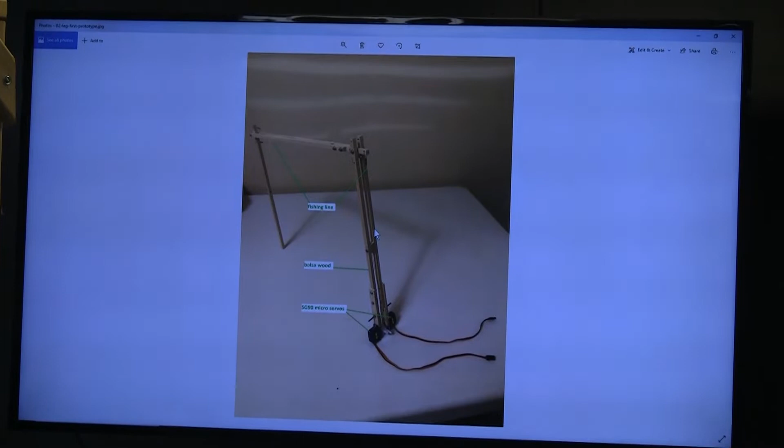So I started experimenting with some designs. I started with micro servos and balsa wood, because it was going to have to be light. But then you can see the design here where I had two servos, one for the inner knuckle and one for the outer knuckle, and I was using fishing line to operate the knuckles.

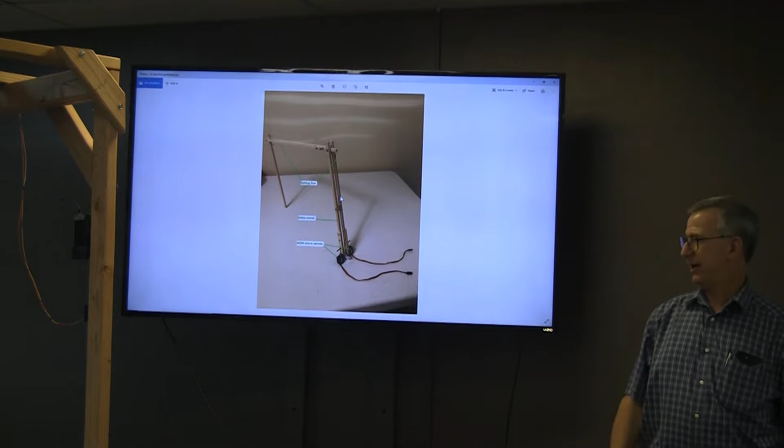And that didn't really work out too well. I was having mechanical problems with it. So I went and enhanced it a little bit and added another joint here.

I started using my 3D printer to print the joints, to make it a little bit more durable and easier to work with. I also went from fishing line to a bowstring here. It's got one servo here to operate the inner knuckle, and one on the other side for the outer knuckle. The bowstring operates the outer knuckle, and the inner joint is just a parallelogram type assembly.

And then to operate the hip, I have a piece of music wire attached to a servo here that moves the hip up. Problem is, those servos are fragile, and I broke about 3 of them before I finally decided there's too much force on the servos and too much weight. It's just not going to work.

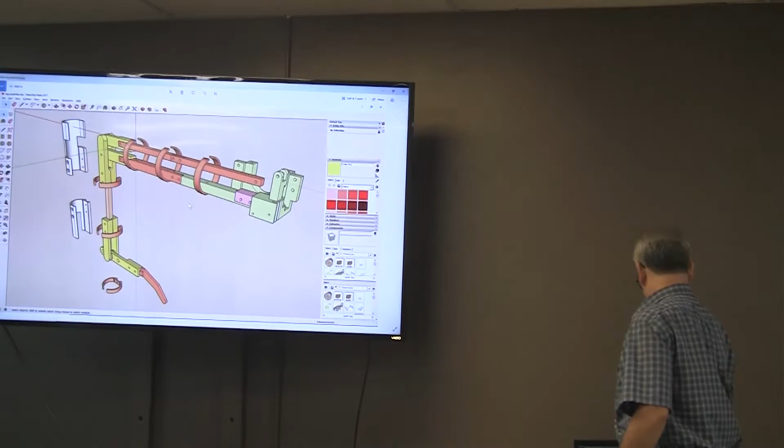So I moved on to the next phase, which was to go to stepper motors, but also to go with a fully blown 3D printed design. Because one of the things I found about balsa wood is every time you put a screw to it, it softens and indents, and then the stuff doesn't fit anymore. Balsa wood is light, and in some cases it's strong, but it just is not very durable.

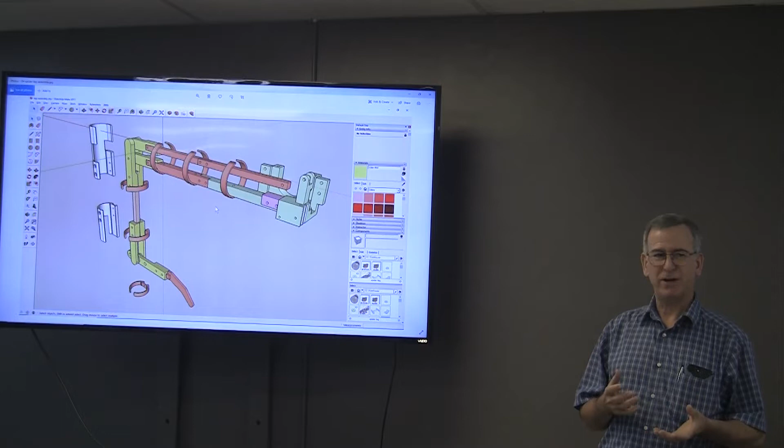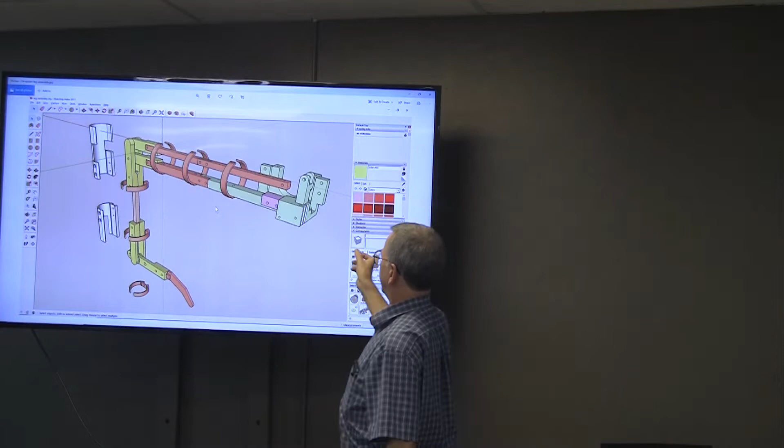So here's my 3D printed leg in Google SketchUp, which is free. The inner knuckle motor goes here. The hip motor, once again, will be out here, controlled up and down with an actuator. And I couldn't get a motor on the leg anywhere, they're just too big.

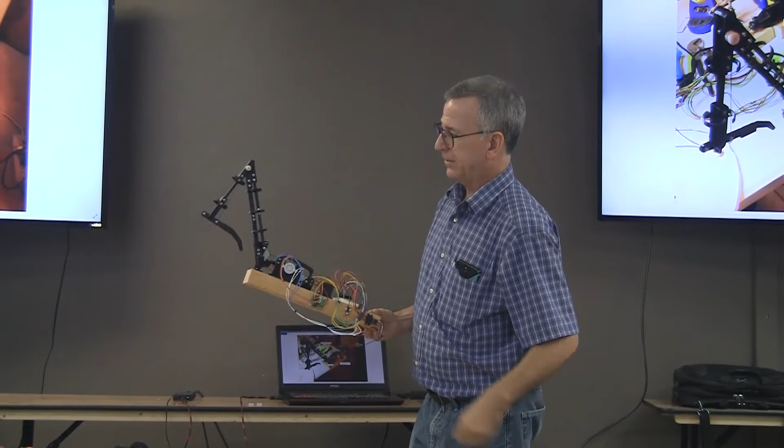So I still went with a bowstring that connects two points here, two opposing points on the outer knuckle, to operate that. It's not against gravity, it's just opposing points on the joint, it'll push or pull. When this armature rotates back and forth, these two points rotate back and forth to operate that. Just like push-pull, like the human body.

And then for the hip joint, to control it up and down, I've got this little actuator bar attached to this third stepper motor. Plus you can see I've got all the stepper motor hardware in here as well, which basically shows you what we were seeing there in a diagram.

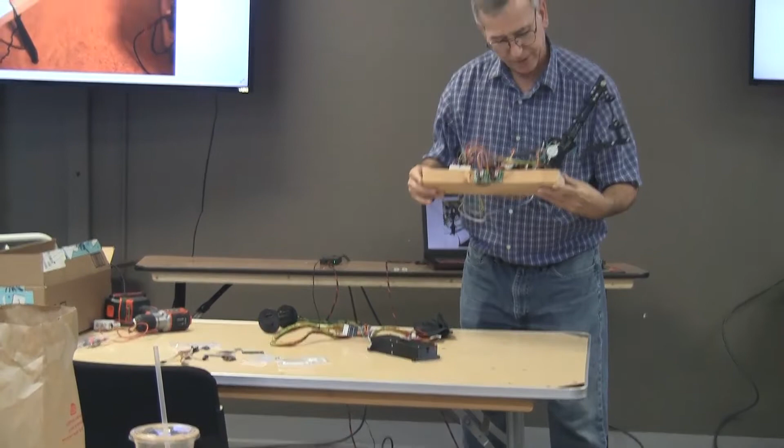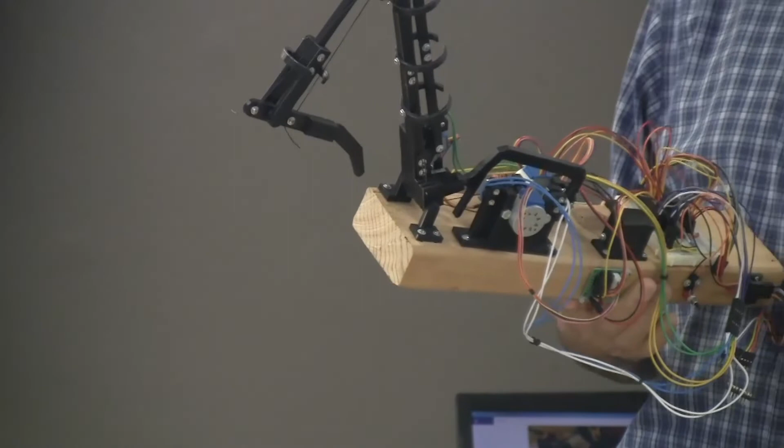There are limit switches. Let's see if I have those attached here. At each extreme of the rotation of the stepper motor, there's a limit switch. You basically hit one, you're at the end, you stop the motor so you don't break anything, then you hit the other. So I've got a clockwise and a counterclockwise limit switch there.

And you just find these small steppers were a little more powerful or durable than the servos? Oh yeah, you get more torque, and they're easier to attach things to. There's a 5-volt version and a 12-volt version, you want to use the 12-volt version to get the extra torque. And that's a geared stepper, not a direct one? It's geared, I think. Yeah, I thought they were.

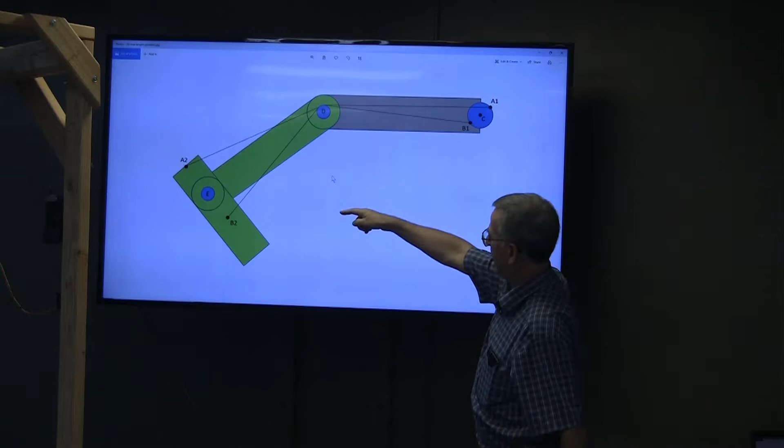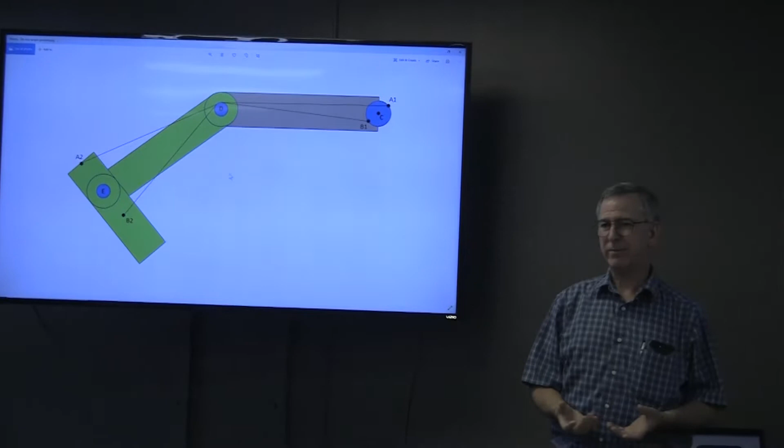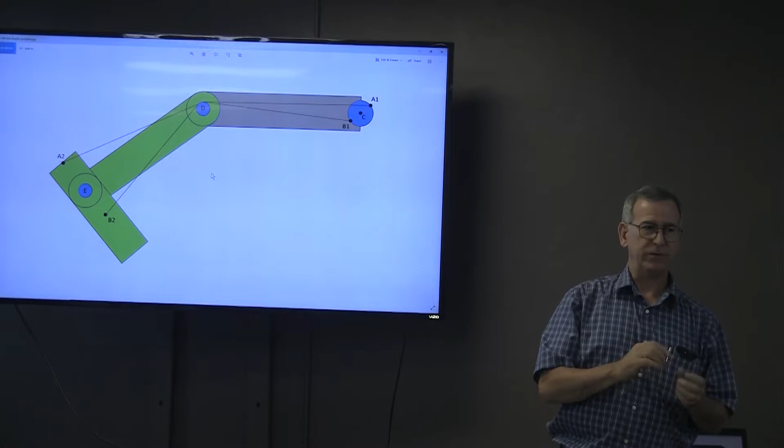This is one of the problems I had to overcome with the bowstring: when you have a bowstring line that runs over this middle joint to operate the outer joint, the line A1 to D to A2 - if you rotate the outer portion down, you can see the bowstring now travels a greater distance around this intermediate point. So every time I'd bend the joint, the string would be tight, and every time I extended the joint, it would be loose, and sometimes it would come loose and not stay attached. I gave up trying to find a mechanical geometrical solution to that. My solution was just to make the diameter D as small as possible - I've got a 16th inch diameter brass rod that the line goes around to minimize that effect. But that was one of the problems I had to deal with.

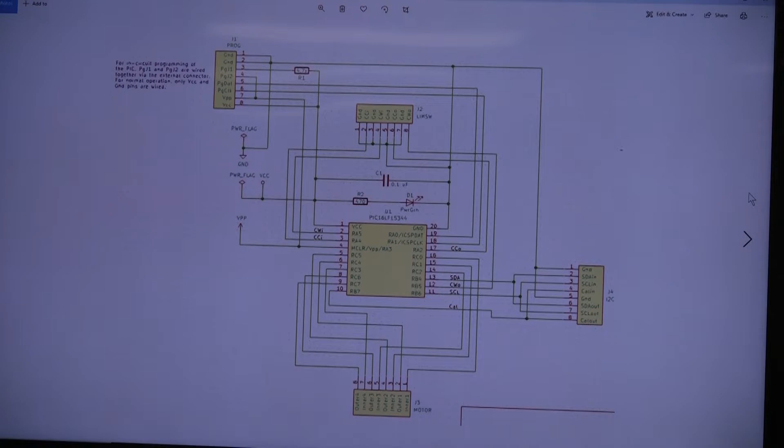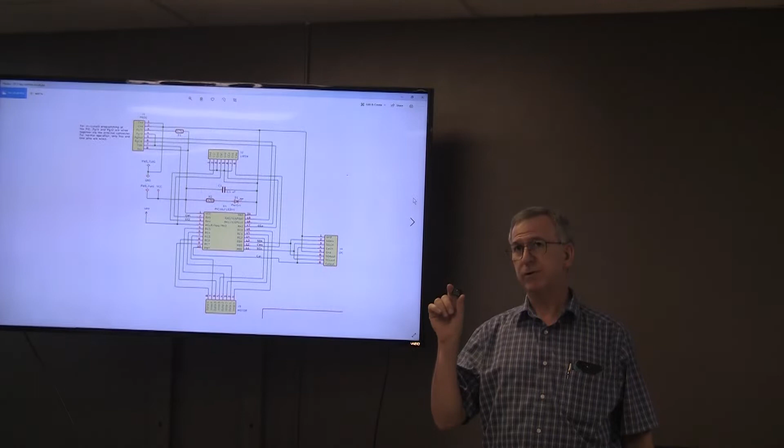This is the spider leg control circuit. I have an earlier version of the design right here. I designed this in KiCad, which is free software for circuit design, and had the boards manufactured by a company called OSH Park. The nice thing is manufacturing these boards is really cheap because they do it in big batches - you get boards this size, 3 of them manufactured for well less than $10. So that's a great resource. The core of every board I've got here is a PIC microcontroller.

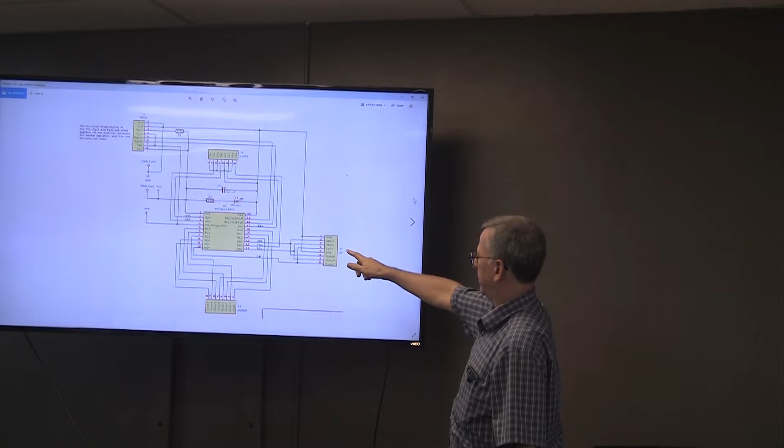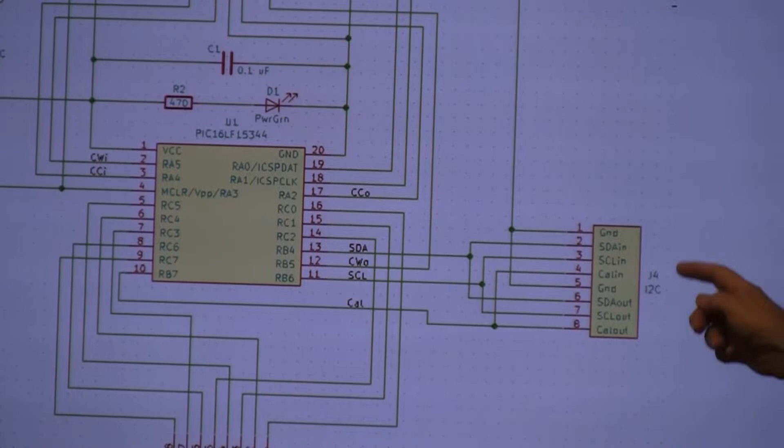This particular one has a power and programming connector feeding in. I've got clockwise and counterclockwise limit switch inputs coming in on some of the IOs. Then I've got a connector over here for communicating with the main controller - the main spider controller - via an I2C interface, so the serial data and serial clock are there. There's also a calibrate line here, I'll explain that later. Finally, the outputs here go to the motor - these are the individual phases of your stepper motor, going to the motor driver.

Then I press the calibration button and it moves to the next state, the stepper range calibration state. Now both knuckles of each leg will go through their full range of motion until they hit a limit switch, and back off, hitting the other limit switch. Now I've got a range of steps that corresponds to a range of resistance or voltages from the flex sensors for each leg. That helps me keep everything calibrated so I don't overrun the end or get any weird stuff going on.

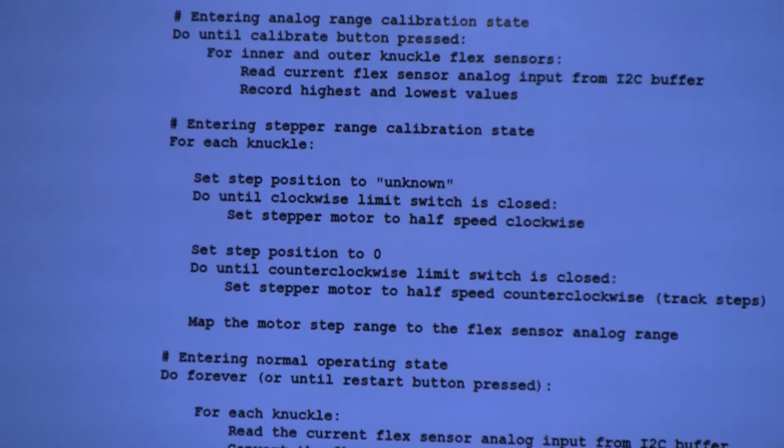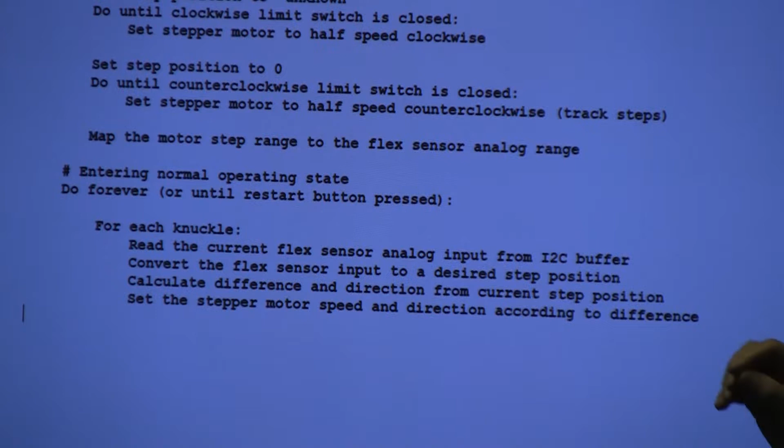After it finishes cycling the motors to the extremes on each knuckle, it automatically goes to the normal operating state. From now on, it just reads the I2C buffer measurements from the flex sensors, converts those flex sensor inputs to the desired step position based on the ranges I found, and based on the difference, calculates the direction it wants to go from the current step position, setting the stepper motor speed and direction accordingly. There's a bit more in there - for example, I put in an algorithm for proportional integral control, which smooths the motions of the leg out a little. So as the knuckle approaches its final position, it slows down and won't overshoot, so it's not very twitchy.

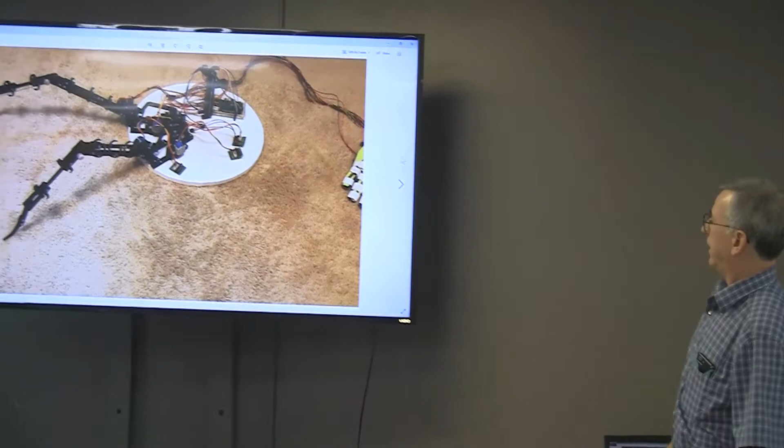Now I had to start deciding how I was going to fit all of this into the frame of a spider. So I started building multiple legs, putting them next to each other and figuring out whether I could fit all the hardware and wiring in there without getting anything snagged. So that's what you see here.

In the early stages, you can see I was driving the legs directly from the glove. This is a prototype of my data glove. You'll see later where I changed that design for remote control.

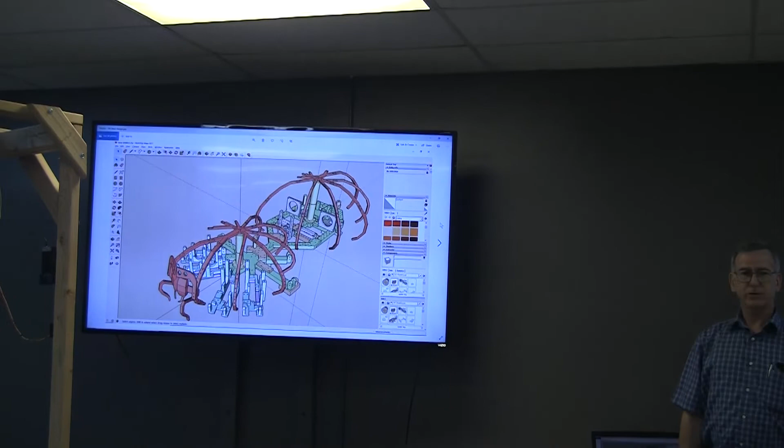So moving on, I went to Google SketchUp and finished out the rest of the frame, the base, and the skeleton.

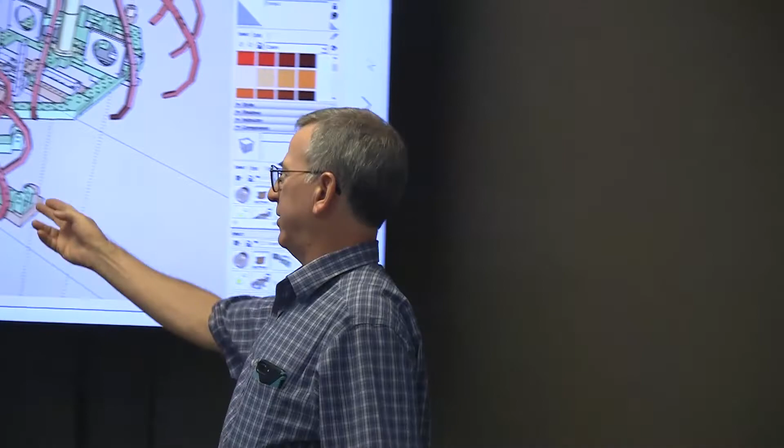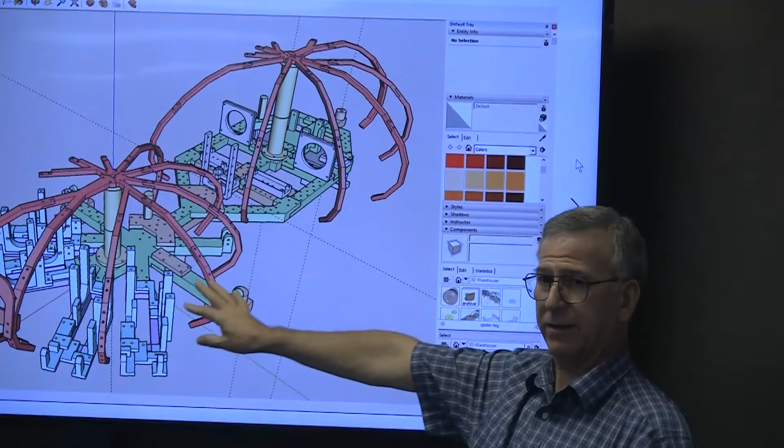Basically you have the 4 operable legs right here. The challenge here, and I wish I'd done this differently, maybe next year I'll modify it, is that one of the problems with these stepper motors is they come with fairly short wires to the driver board. I was unwilling to cut those permanently and extend the cable, so I had to mount the control boards as close to the motors as possible. This really created a mess because there's a lot of stuff packed into the end legs. If I modify this design in the future, I want to put longer wires in there and pull those boards back into the middle of the spider, leaving more room, because it's really a pain to take them apart, make adjustments, and put it back together.

You can see positions for speakers here, because I wanted to put sound in. There's a center stack for mounting my leg controller boards, 6 of them in there.

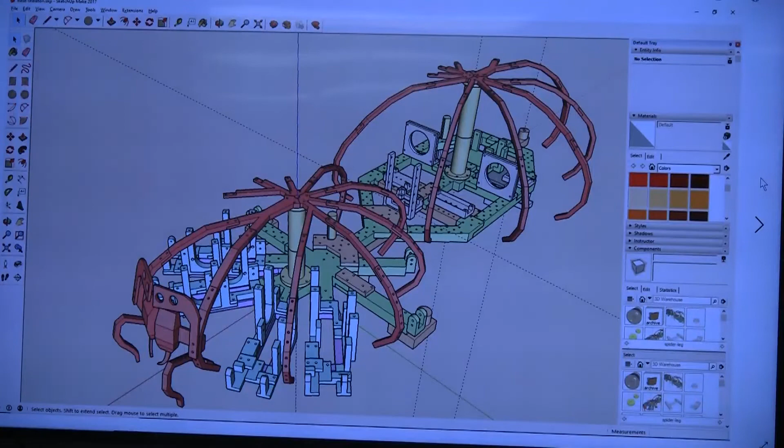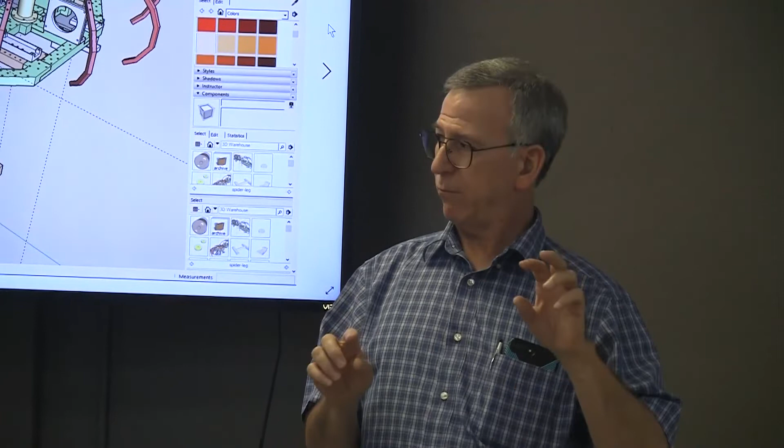For each leg, the inner and outer joints are operated by one leg controller board each. For the hips, I've got a bend sensor in the wrist of the glove that controls hip position, but all the hips raise and lower together. We've got one board to drive the hip joints on the right, and one board to drive the hip joints on the left. So that's why I need 6 boards.

So was that for a twerking spider? What's that, the hip joint movement? I'm just going for as much realism as I can get to.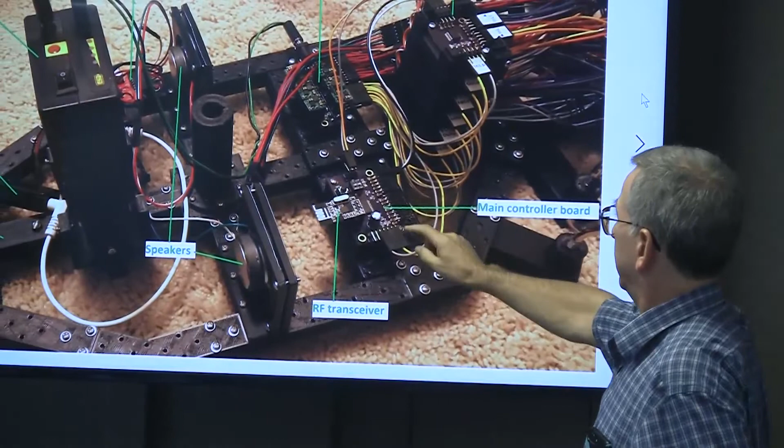So here's a closer look at the innards. There's the leg and hip controller stack, where I've got power here, and the motor connections out on this side. This is all on an I2C interface, so they're daisy chained together on the opposite side - you can see the wires there. All the leg controller boards are daisy chained, and I've got the master controller board here, which talks through the I2C interface to this stack. So there's a master for the 6 legs.

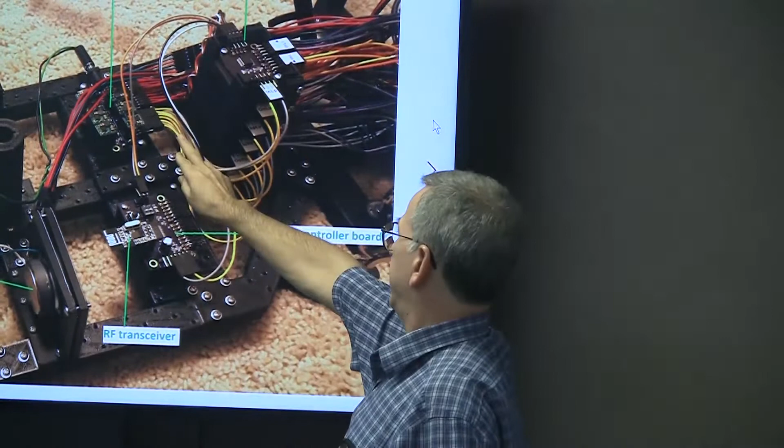Also in KiCad, I had a manufacturer make an Oshpark power distribution board. These are 12-volt step-down converters, 12 volts to 3 volts. So we've got the red line, which is 12 volts going out to the stepper motors, and 3 volts coming out of the power distribution to all the electronics.

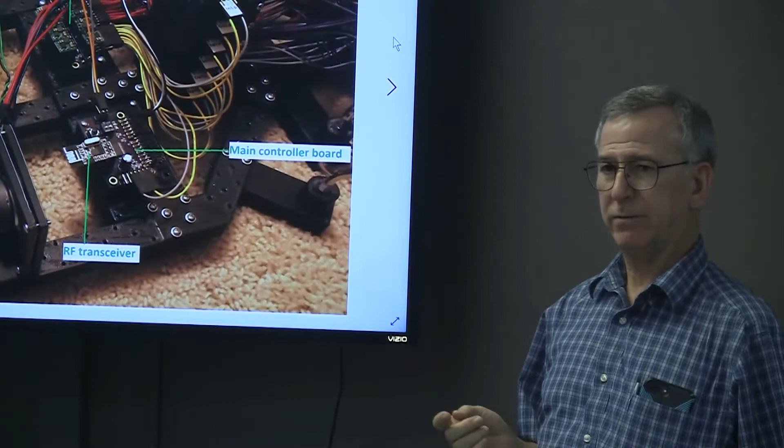The main controller is also responsible for remote control. So there's an RF transceiver plugged into the main controller board to talk with the unit on the glove side.

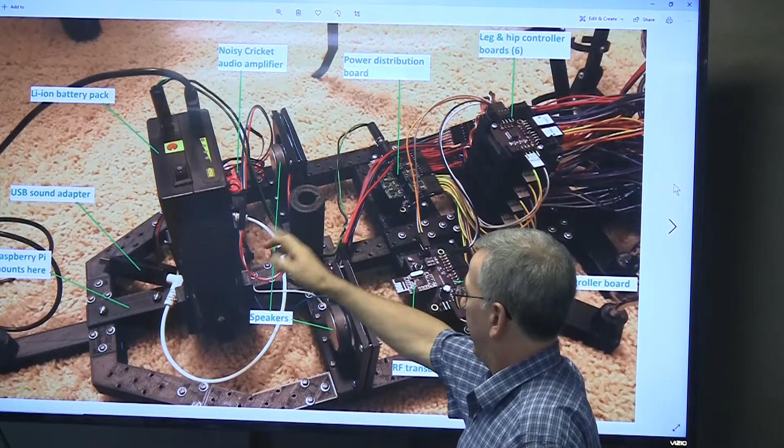Of course there's my speakers. I got a Noisy Cricket audio amplifier from SparkFun, a nice small amplifier to use with the Raspberry Pi. I also needed a USB sound adapter that routes into it. This battery pack is an older design - I went from vertical to putting it underneath because I realized I needed to get to the power switch, so I found it easier putting it underneath instead. And then the Raspberry Pi that I use for playing sounds and lighting the eyes goes here.

Your RF transceiver, is that Wi-Fi or? No, it's basically like RC control type, the same kind of chip they use in RC planes and drones. They're pretty cheap too.

One of the design constraints here was I didn't want to blow a lot of money doing this, so the boards are not very expensive to manufacture. All the software I'm using is free. The stepper motors are really cheap, less than $5 each. So you can get away with a lot if you're willing to make some sacrifices in your design.

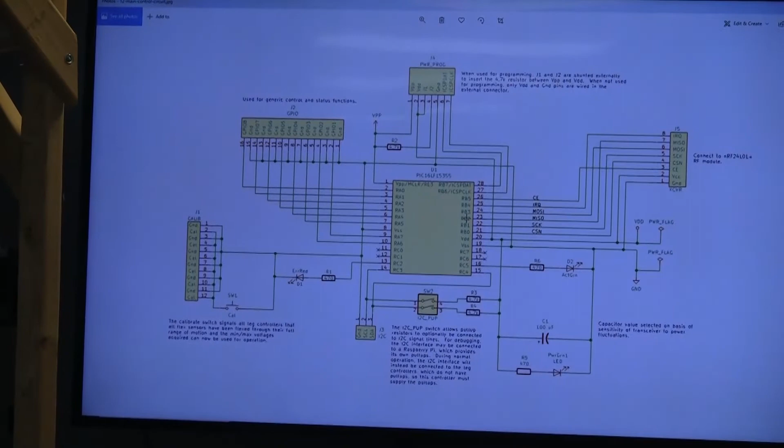Okay, this is the main controller that I talked about earlier. Once again, it's got a Microchip PIC microcontroller in the center of it. The RF module doesn't use I2C, it uses the SPI interface, so there's a SPI interface connector right here to the RF module.

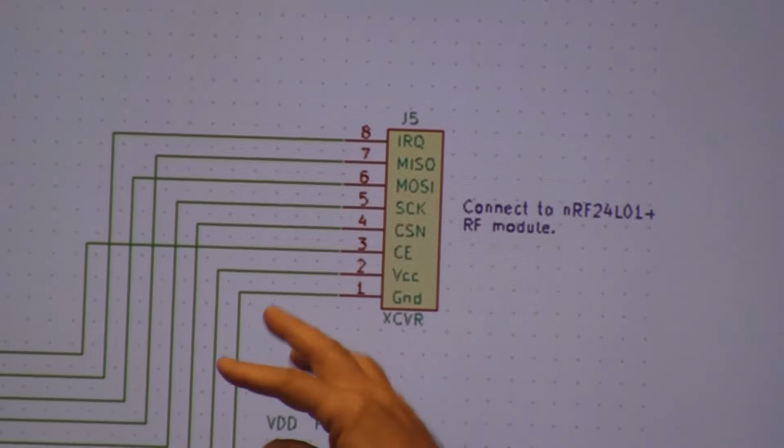I've got a little semi-standard power and programming connector that I use. It's got a jumper on it so I can tell when I'm programming or tell when I'm just supplying power.

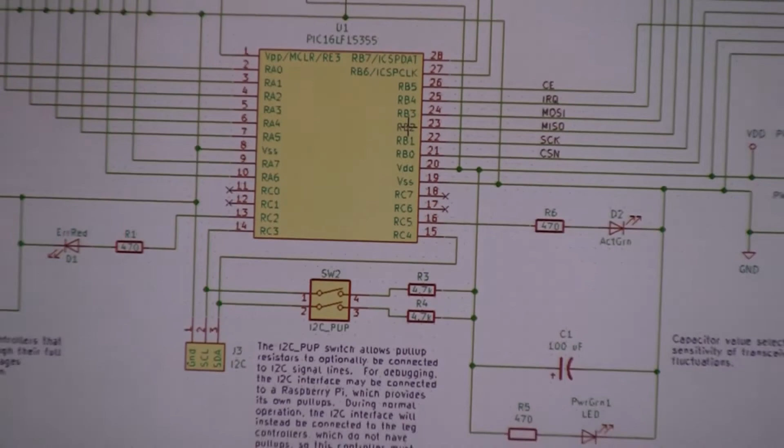I don't really use all of these anymore because I changed the design, and I only use one calibration line that goes to the whole stack of leg controllers, and that sends the signal, daisy chains the signal to all the controllers in the stack.

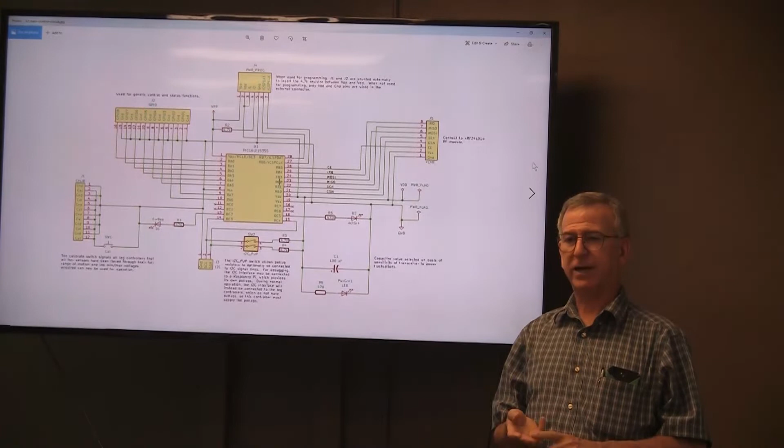I didn't mark the individual uses for these GPIOs that I pulled out, but these GPIOs are for, well, there's the calibrate signal, there's the signals that go to the Raspberry Pi and the Raspberry Pi's GPIOs for selecting the sounds to play, and there's the motor signals to operate the gantry motor to lift the spider up, and those have to come out of these IOs right here. Now we'll get into that.

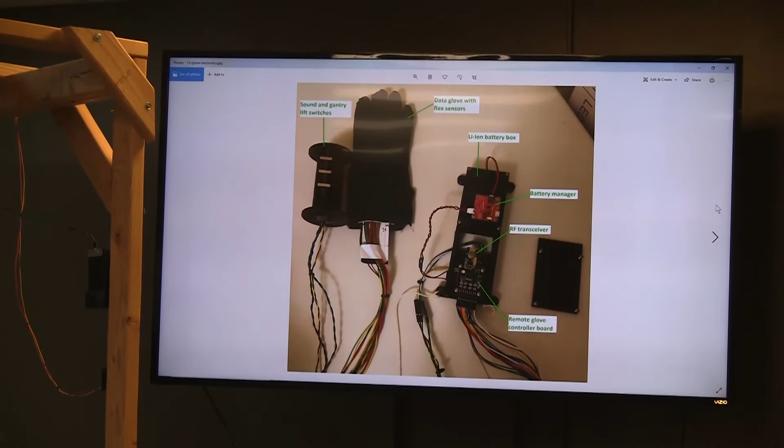All right, so here's the glove hardware. We've got an RF transceiver, just like the one on the main controller, that plugs into the board. The remote control board for the glove is here.

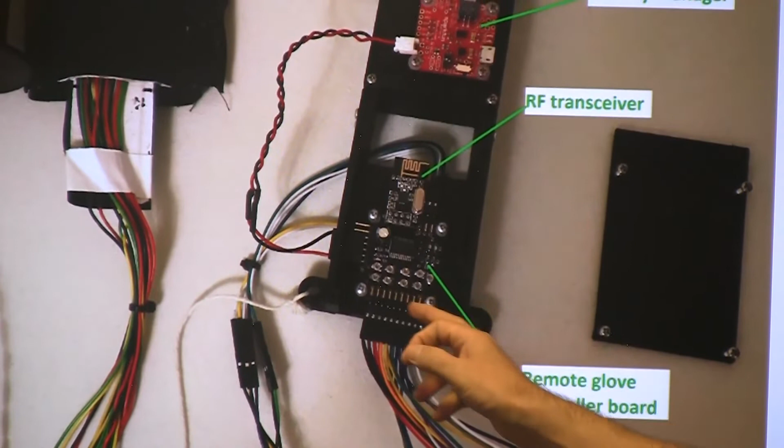And you can see on this side, I put a little extra hardware in there I needed to be able to adjust the resistance of the flex sensors a little bit, because that's kind of a little bit variable, so I needed to be able to tune these.

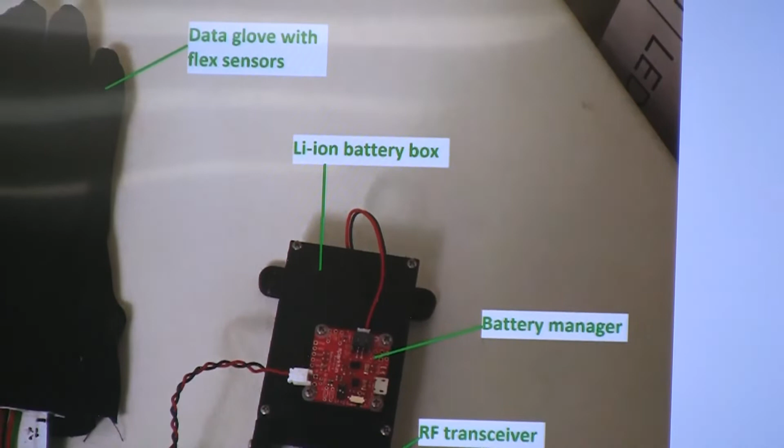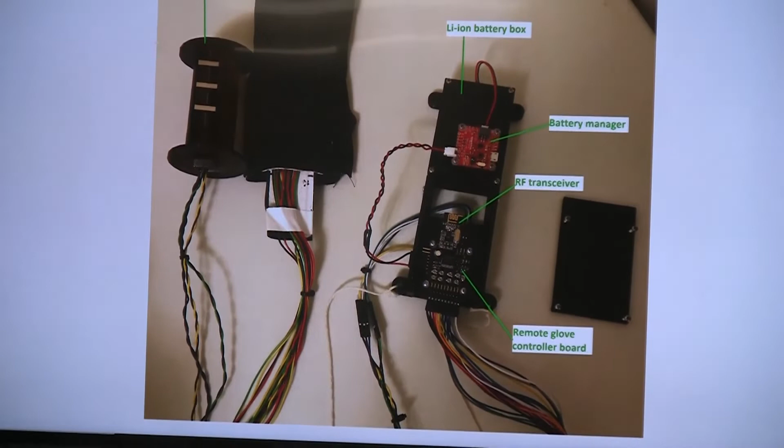Other than that, there's a lithium-ion battery inside that box, and I put a battery manager right here to help with the power. And then there's also a 3D printed design for the other hand that has 3 switches on it. Two switches select sounds to play, and one switch is a toggle that raises and lowers the spider of the gantry.

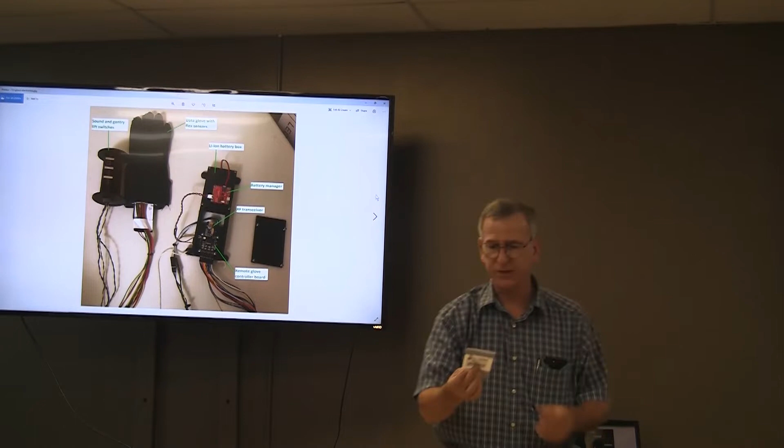And the flex sensors, I don't know if y'all have ever seen them, but I've got a sample here. You get these from Adafruit. Unfortunately, these are one of the more expensive components. This one 4-inch flex sensor is $13.

How many did you need on the glove, total flex sensors? I had 4 long ones and 4 short ones—I'm sorry, 5 long ones and 4 short ones, because I had the wrist sensor as well.

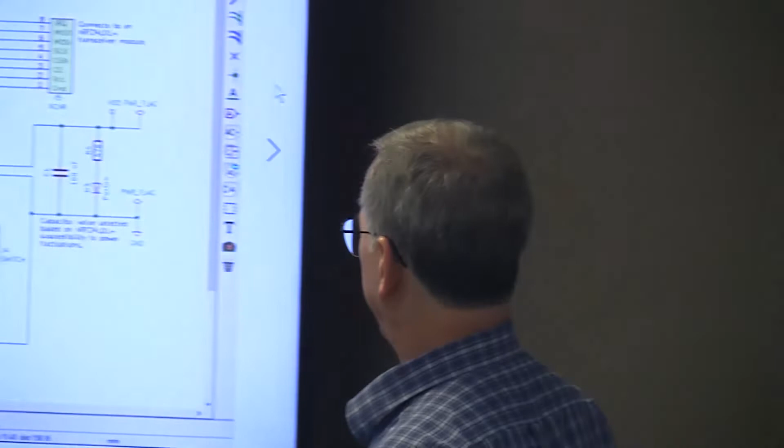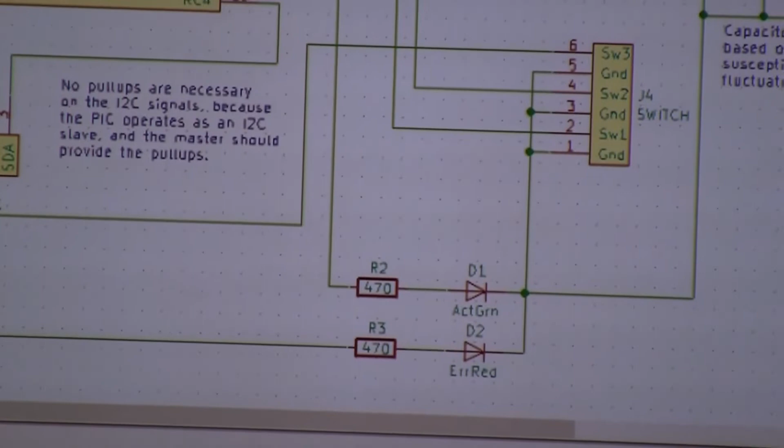And let's see, this is—did I just go backwards? No, I didn't. This is actually the glove board. You can see there's the trim pots that I put on the board. Once again, the PIC and an RF connection, power and programming connection, and then the IOs for the switch come in through this connector, and then all of the flex sensors come through this port right here.

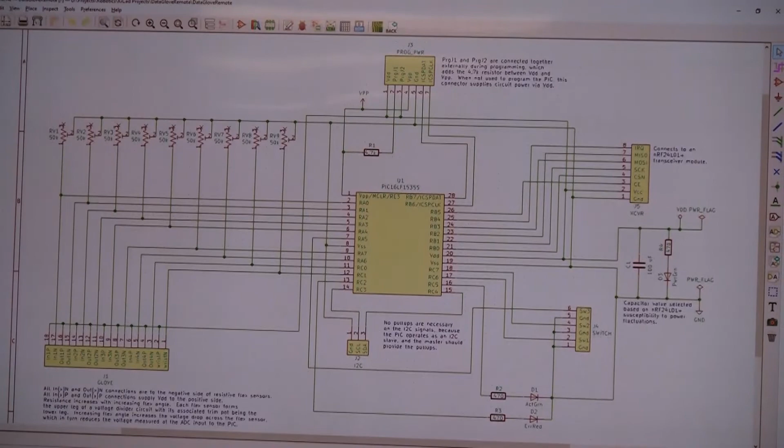So one of the things I had to do here was account for the PIC only being able to measure up to—at least the low power PIC that operates at 3.3 volts—it can only measure voltages up to 2 volts. So that's the other reason I had to have some kind of tunable pot in here. Each circuit here is a voltage divider, and I need to be able to adjust the pot so that the maximum flexure would generate a voltage right at about 2 volts. That's the extreme of what the PIC can measure.

You couldn't source the resistors with a lower voltage—you could have, I guess, but you could have regulated a 2 volt or whatever supply for the flex sensors, and then they would be limited to that voltage. No, that's one thing I hadn't considered. But anyway, either way, yeah, I could have put a 2 volt supply regulator in there. That's a good idea.

And then, not much to see here, because you can see the gantry yourself, except that the motors—and this is before I put a box on the motor, because one of the problems with this motor is it's very noisy. So I kind of put a box around it and put some rubber in there on the mounts, and it's still kind of noisy, but, you know. And then, of course, there's the wire you see coming down here to the motor controller for the lifting and the lowering.

That's taser wire, which you might find very useful. It's very thin, very hard to see, so at night it just looks like part of the webbing. That's one of the reasons I chose taser wire. But it does tangle easily, and you get caught in it like real spider web.

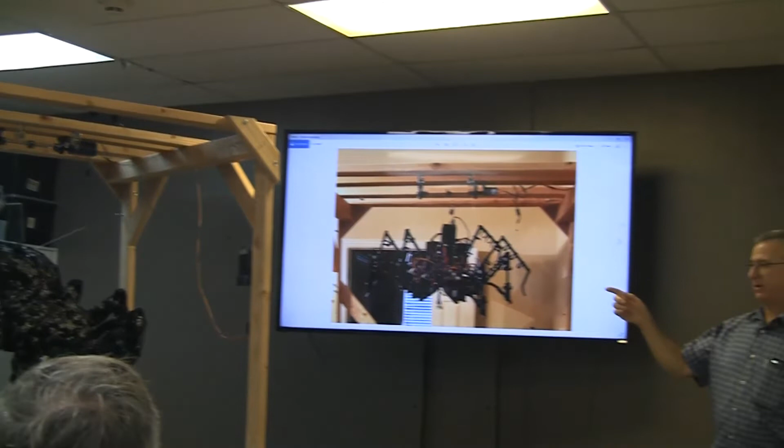But so the taser wire, what's the purpose of the taser wire? Well, the spider has one of these power packs, and the gantry has one of these power packs. But I'm not using remote control to go from the spider to the spider gantry motor, so I needed to run the wires up to control, just signals. I don't want the spider driving the gantry motor - not the power driving the motor on the frame. So it's not cutting into the spider's power, it kind of splits the power distribution.

Okay, so this is where it was finally coming together. Went to Jo-Ann's with Mike's wife and sister and picked out some fabric, and they're the ones who basically did all the hard work on the fabric, because I don't sew.

And I will chime in that was interesting, because my wife decided to mess her shoulder up. She was planning to do all the sewing, so my sister ended up having to do all the sewing, and she was not real happy with all of the problems, because it took her quite a bit of work to get that fabric wrapped around there in a way that looked like it should.

Yeah, we were wondering about the silver in that - did you guys paint that on? No, that's the way the fabric came.

It's hard to work with, very difficult to work with. Is there any name for that fabric type? No, it was something they set out for, I think, for Halloween. Was it Halloween fabric? I'm not sure if they explicitly set it out for Halloween, or we just managed to find it. They spent hours at the fabric store looking, because we wanted something light and fairly thin, with some furry look to it.

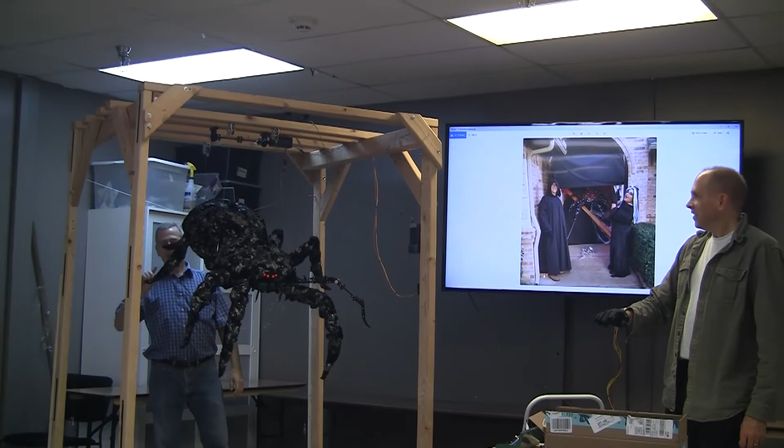For some reason, I think I've got feedback in there where it triggers one of the GPIOs when I reset the calibration. It works, but it doesn't like a reset. So now flex your fingers to the full range of motion.

Flex out, out, flex back, flex out. And bend your wrist up and down.

Now, don't calibrate now according to, let's wait for it now. Wait, okay, not yet. It's still doing its thing. It's not in the state yet where it'll operate.

It wants to teach Carl what to do. Who's controlling who? Then move over so you can see what you're doing.

Since you have limit switches on the stepper motors, why do you need this calibration? Maybe it's a little bit of overkill, but the stepper motors will slip over time if you apply any kind of weight. So there's a lot of things in here that I did that may not seem necessary.

If you keep flexing those sensors, probably the resistance is going to change a little over time. That's the other thing too, you can measure each of these flex sensors to their full range, and they don't all match exactly. Plus there's variations in the glove, and how the flex sensors fit against the fingers. So I basically tried to eliminate having to mess with any of that by making everything adjustable.

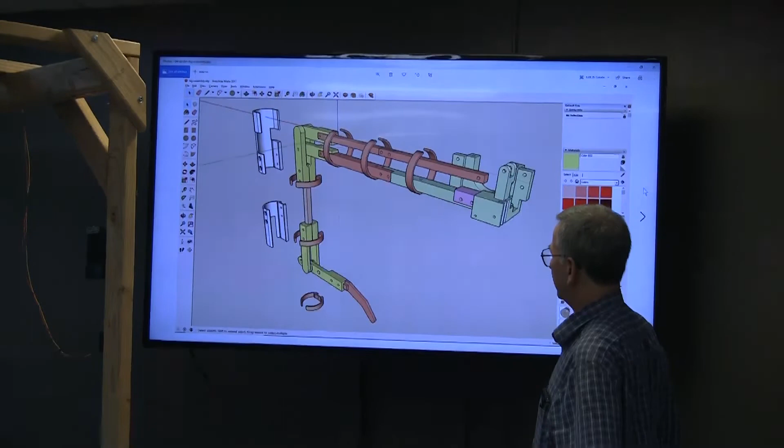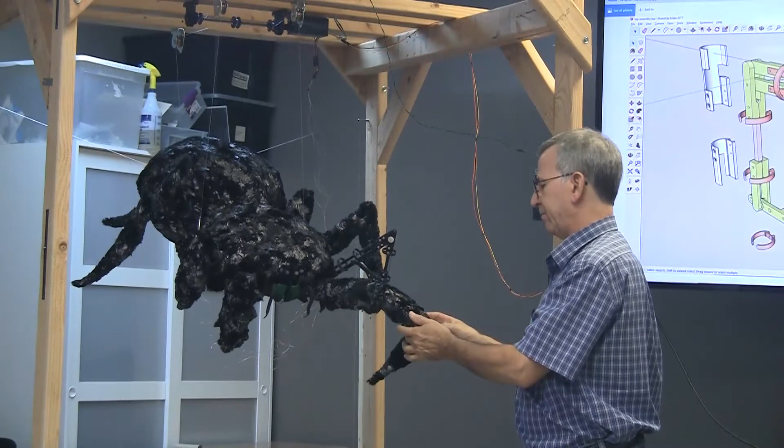Trying to overcome some of the difficult problems like the fabric being snagged. One of the things I had that I didn't explain was in the leg design, these white pieces you see out here on the end. I was experimenting with different ways to mount a sheath on the outside of the leg. Instead of having fabric sitting loosely over these ribs, I was thinking I could attach the fabric to these sheaths and have segments of fabric, not one long piece, with maybe a split that you really couldn't see well. That would keep this material from binding up on the leg and preventing the joint from moving. So that's one of the things to overcome.

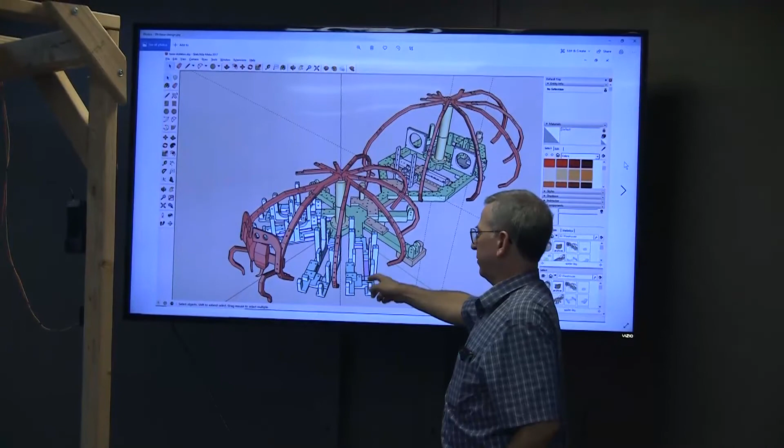The other thing is, as I pointed out, all of the motor driver hardware being packed into this small space makes working with the whole thing very difficult to take apart, adjust, and put back together. So if I come up with some extensions to those stepper motor connections, move the boards back further into the spine... Were they a weird pin spacing?

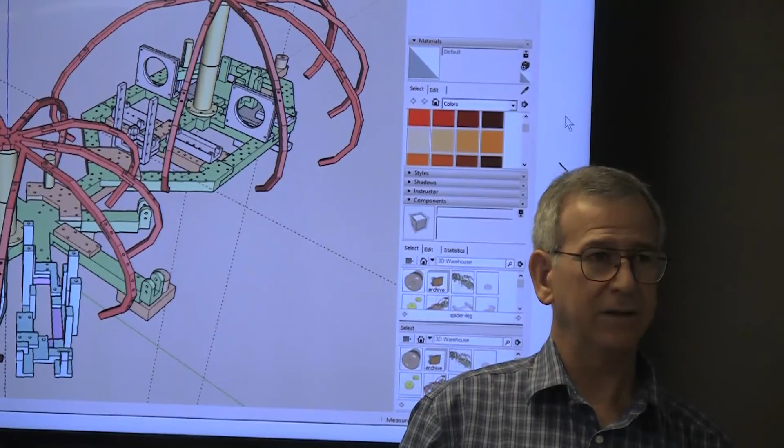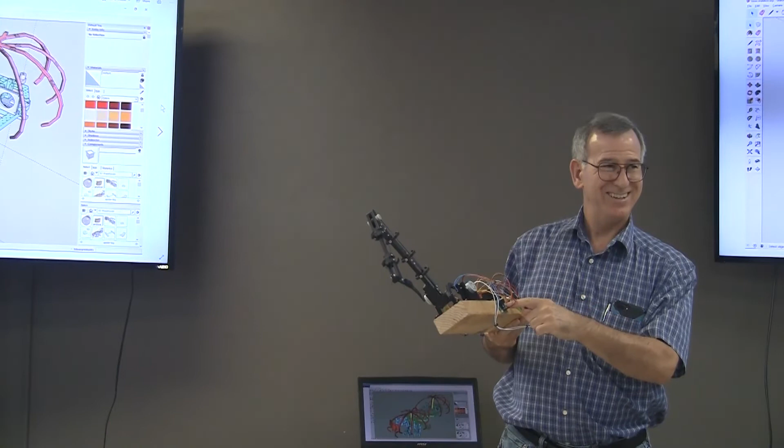Were they like 2 millimeter or something on the stepper motors? Were they not standard? I don't know if you see these here. It's just kind of funny because I went and purchased some prefabricated connectors and wires that I thought would do the trick, to hook up an extension so I could move the board back. When I got them, I found they were smaller than these. Maybe these are JSTs then, 2 millimeter? JST PH. So basically what I got was 2 millimeter, and these are 2.5. So 0.1 inch versus... and I haven't been able to find prefabricated wires out. Now that I know I need 2.54 millimeter, maybe I can find it.

Do flex circuits? I see OSH Park does flex, right? I was looking here, it looks like OSH Park does flexible circuits, so you might could get just... Expensive? Well, it's already cheap for them to manufacture. I wonder, but they're probably betting on economy of scale, right? Lots of people do these kind of circuit boards. How many people are doing the flexible ones?

That's probably gonna be a... It looked like similar price rates per square inch, so if we could... a little longer lead time. Well, can they run it when their board's full, right? So they just wait to get enough orders to fill a board. I don't know how often they do that. That's half why the lead time's longer. 10... that's 5 square inches, so that's now $25 for that cable.

You might do better to find jumper cables and gizmos. Yeah, or I just bite the bullet and permanently cut the wires and... Or you could solder it back. Make a little adapter wherever at the end of your stepper motor cable that's 2 millimeter, get the little pins, and then that adapter board, since it's about a quarter of a square inch, that's literally what OSH Park will charge you. They'll charge you a fourth of $5, about $1.25, and no shipping.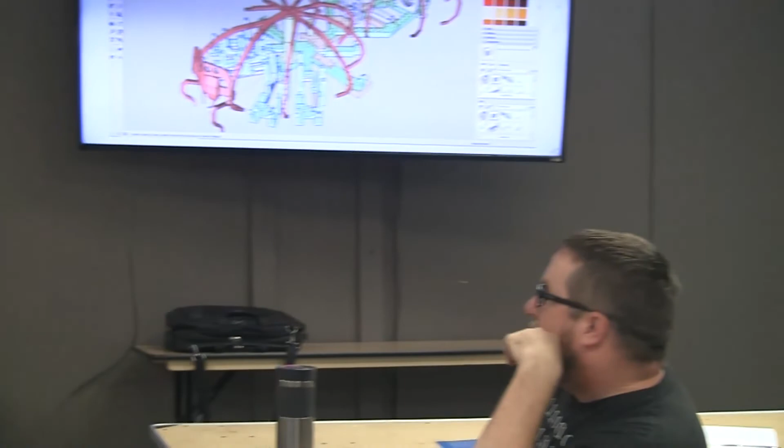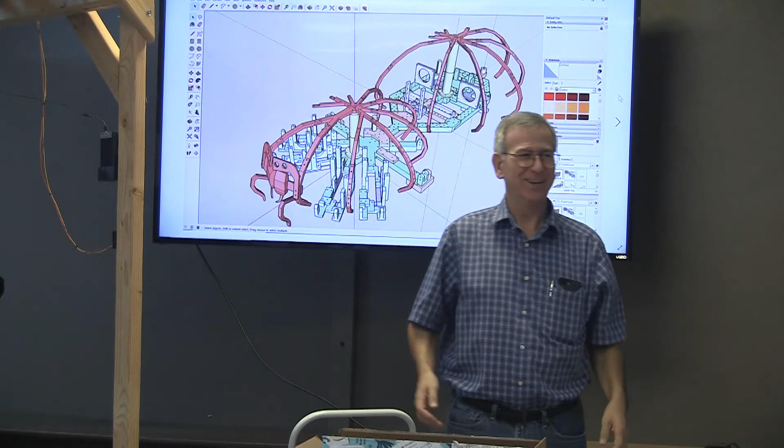So if you need 3 of those boards to play with, I've had orders that size where the shipping probably cost them $2, but they've mailed it to me and given me the boards for like $1 or $2. Well, here's the thing, this is probably just overkill again, that I was trying to go through too much effort to avoid cutting the wires and soldering them back. Might as well just do that. Save yourself the extra effort, do a permanent modification, what's it gonna hurt, right? It gets bad doing 100 wires. You hate modifying something that you can't unmodify, right? That's kind of the John principle.

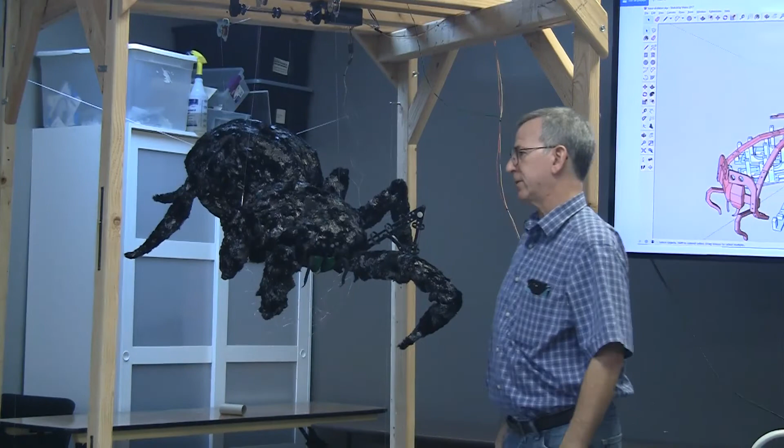Let me talk about this - is the fabric binding at the top of the knuckle, or is it bunching underneath? At the bottom, it's bunching underneath. So it's not snagging on the top at all? Sometimes if it's taut from here all the way to the end, there's a little extra force on the top, but mostly the problem's on the bottom. So if it's on the bottom, as long as your fabric is staying the same, you can tack the tips.

I'll pass the fabric around so you guys can feel it. Tack the tips, it's cool. Don't give it to Ray, don't give it to Ray.

When it comes to that inside joint, just take a piece of this soft plastic and attach it sewn onto that so that it slides. What it's going to do is make it stand out just a little bit, as long as it's flexible, because what's happening is the fabric itself is too soft, so you stiffen it. It needs to be covered in spandex, so it stretches.

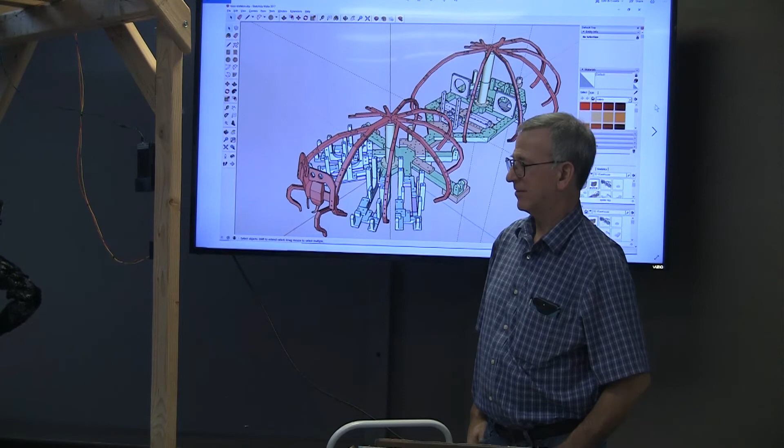If you've got an extra piece of fabric, I could try playing around with it, but you'd just need a strip maybe this long and about that wide of the fabric - you need a roll of stuff. That will bend because it's soft, but the plastic will keep it from bunching up inside that joint.

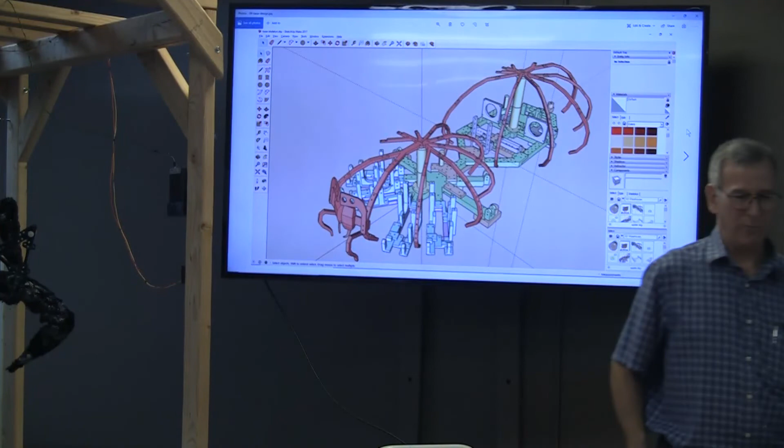That's just - I'd have to devise some way to attach the plastic. You sew it, kind of, where it fits in the design. You have to look at it. You just sew it, as long as you've got your tips. It's a bendable plastic stuff. The piece is not attached to the leg, it's attached to the fabric. Okay, I see what you're saying.

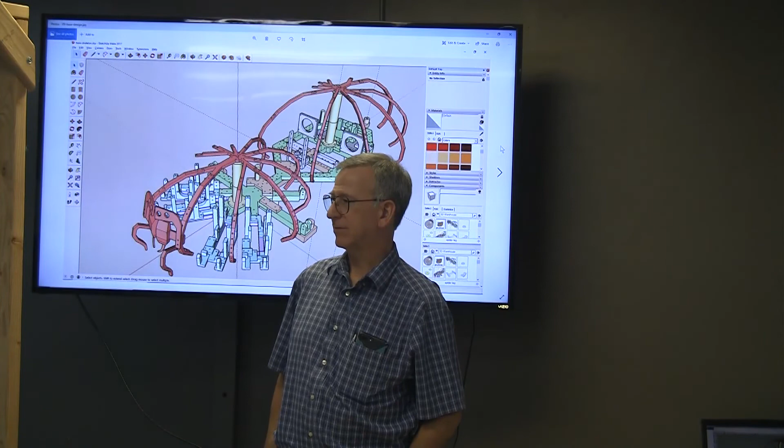If you tack the tips of these legs to the end of your actual plastic, then that's not going to fall off and that's going to keep things in place. You can tack it in two other places to make sure it stays in place in that plastic. That keeps everything flexible, covered, and loose, and you don't have to redesign a bunch of stuff. But if I work on this for next year, I'll consider that.

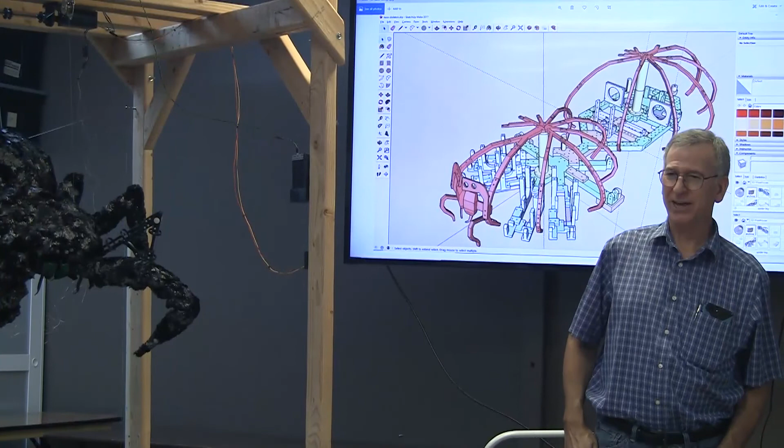For the younger kids that aren't afraid of it, I think you can add like a silly string sprayer in the back, and add another switch to activate a new leg - a web thrower, or launch out a whole bunch of little bitty spiders and shoot them out the front. That's one of the considerations I had to think about.

One of the things I thought about with those extra spiders - I would have some boards that would come out from the top and hang further out. So when people walked up to look, I could hit a switch and drop a bunch of spiders on them, especially when they decide they're not scared - something sudden. But at Halloween, you have to worry about bigger kids getting scared, running away, knocking over little kids on the sidewalk.

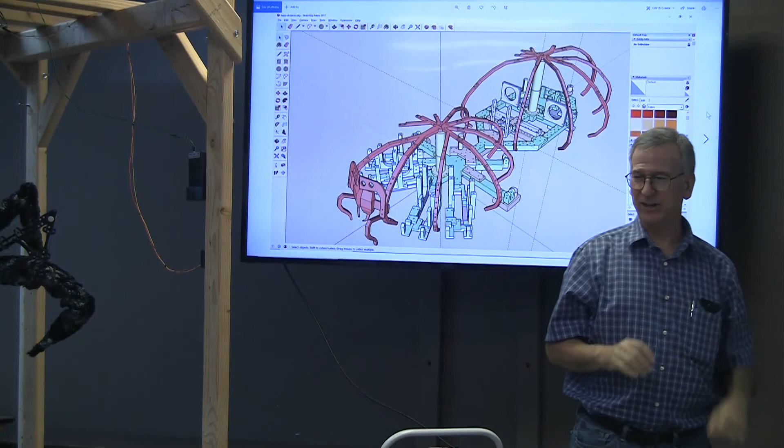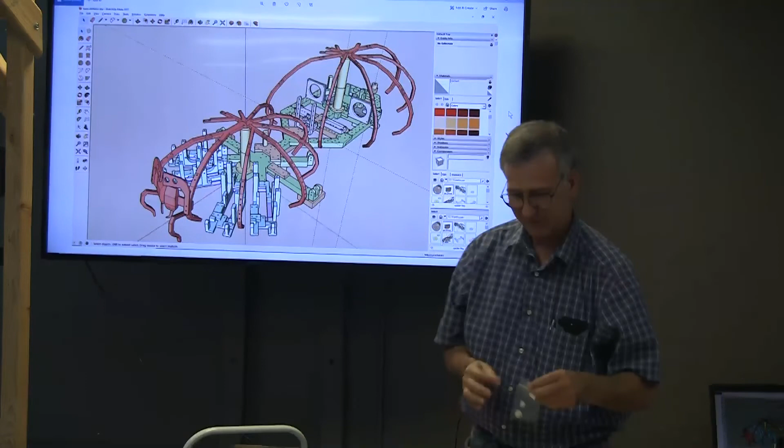I don't know about that. There's a needle sticking in it - that's what gets everybody. That's funny, don't show your needles. Good thing he didn't poke somebody in the face when they were rubbing it on their face. I was gonna take it and make a little hairpiece out of it - emergency toupee, emergency surgery. I've been there.